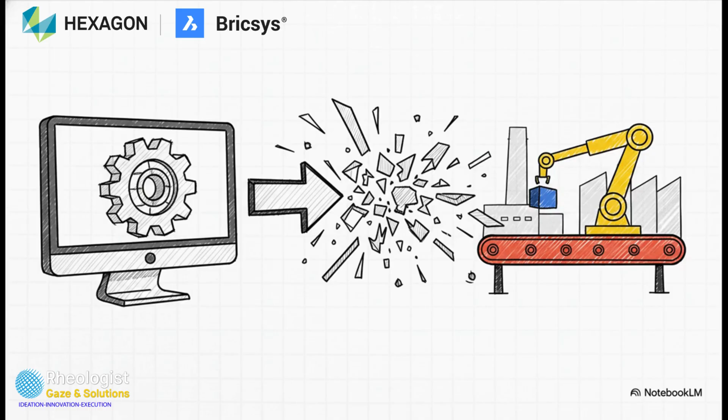That question leads us straight to one of the biggest challenges in modern manufacturing. It's this bottleneck, this friction point that happens when a digital design has to cross over into the physical world. It's one thing to create this beautiful, perfect 3D model on your computer screen, but it's a completely different ballgame to translate that file into clear, mistake-free drawings and parts lists that someone on the factory floor can actually use to build the thing. That handoff, that's where things so often get stuck.

So how do you even begin to fix a problem that big? Well, BricsCAD Mechanical says you have to start at the foundation. Before you can design any faster, you've got to solve two of the biggest headaches in this whole industry: making sure your files can talk to everyone else's, and not getting trapped by expensive software subscriptions. Here's how they tackle those headaches.

First, they stick to the industry-standard DWG format. That means you're not wasting time rebuilding files just because a supplier or a partner uses different software. And second, they offer perpetual licenses. You actually own the software. It's a way for companies to get off that endless treadmill of subscriptions. It's all about giving you control and flexibility right from the start.

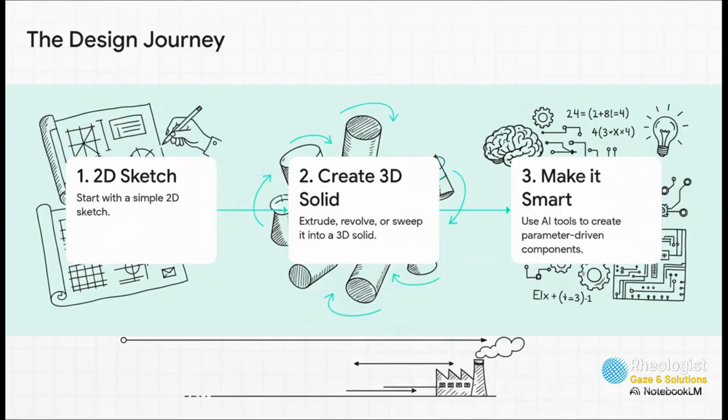Okay, so with that flexible foundation sorted out, we can finally get to the fun part, the design process itself. How does this software actually help you model things faster? The workflow is actually pretty slick. You can start with a simple 2D sketch and then instantly pop it out into a 3D solid. But here's where the magic happens.

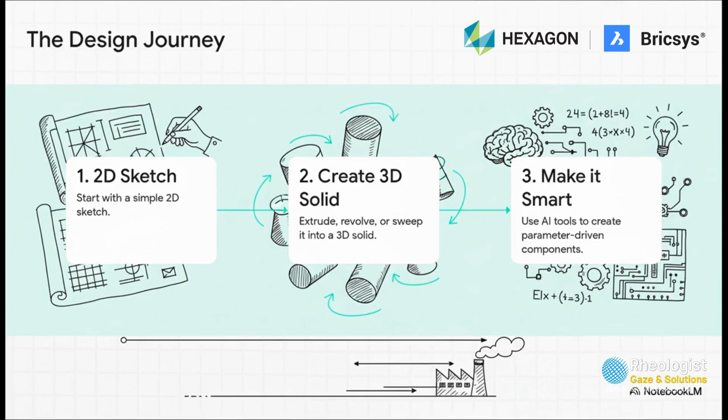AI-powered tools then analyze that shape and make it smart. It becomes parameter-driven. So instead of having to remodel everything, you can just change one number, like the length or the diameter, and the whole part intelligently updates itself. That is a total game changer for making quick changes.

Take a look at this number, 30,000. Any ideas what that might be? That is the number of standard mechanical parts that are already built into the library. We're talking bolts, screws, bearings, you name it, over 800 different types. This means designers can stop wasting hours and hours modeling common parts from scratch and just drag and drop whatever they need right into their design.

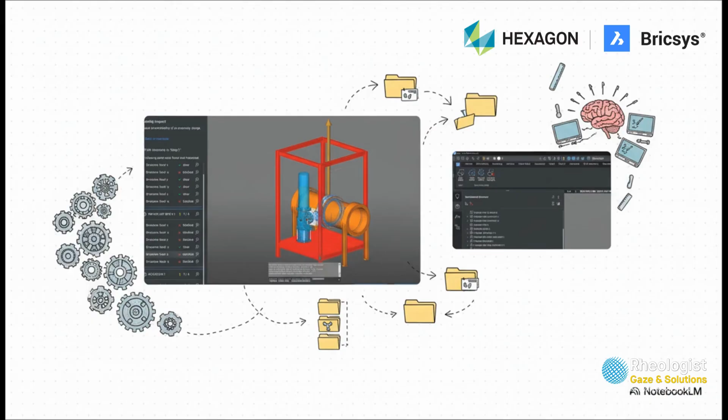And of course, when you're working with thousands of parts like that, staying organized is absolutely key. The mechanical browser, which you see here, is basically your command center. It gives you this clean, simple breakdown of your entire assembly, so you can find and change any part you want, no sweat. Okay, so our digital model is done.

It looks great, but it's still just pixels on a screen. How do we actually get it made? This brings us to that final, critical step, bridging the gap between the design and the factory floor.

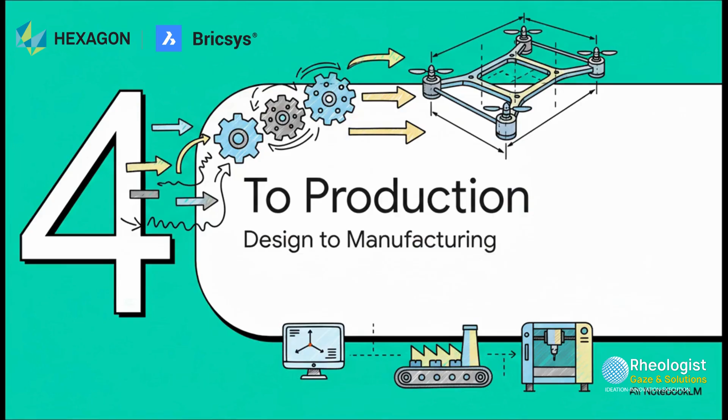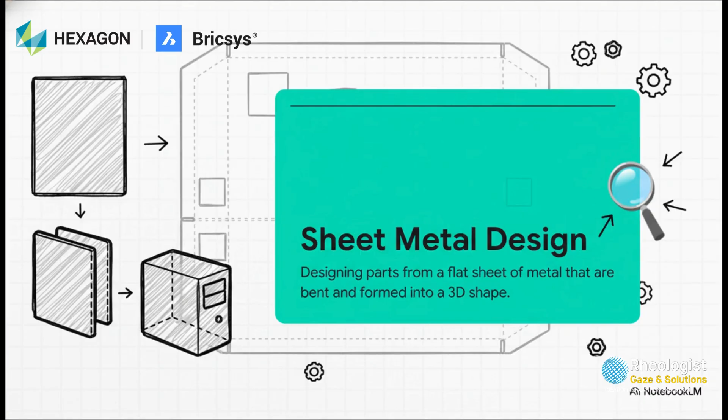First up, let's talk about a really common process, sheet metal. For anyone who's not familiar, it's pretty simple. It's just the process of making 3D parts by folding and bending flat pieces of metal. Think about things like a computer case or an electrical enclosure. So BricsCAD speeds this whole thing up by letting you take a 3D solid and, with just a few clicks, automatically unfold it into a flat pattern that's ready to be manufactured.

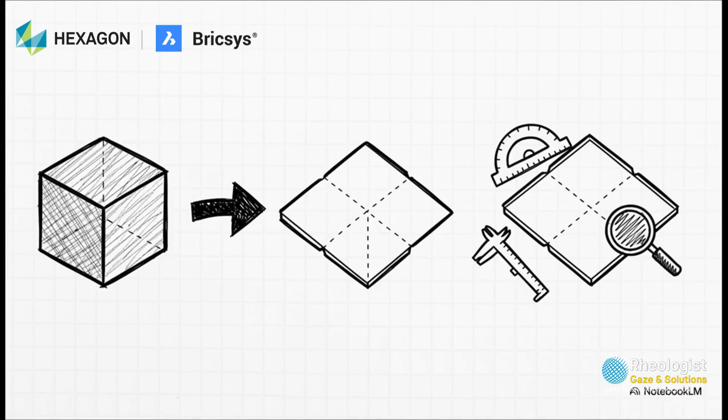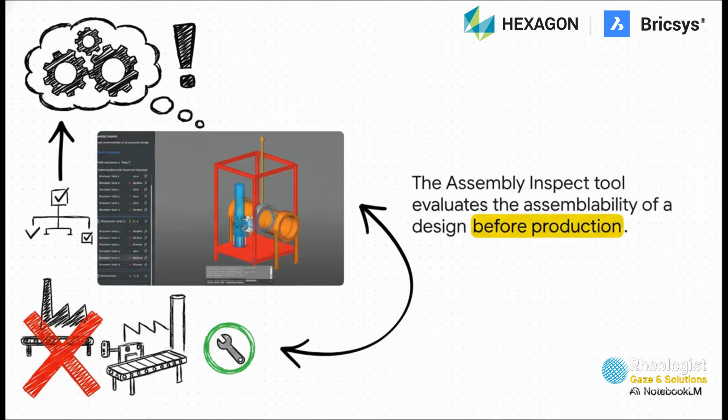From there, you've got all the tools you need to tweak every single bend and corner to make sure it's perfect. But here's the crucial question: how do you know if all those parts can actually be put together in the real world? That is exactly what the Assembly Inspect tool is for. It lets you digitally simulate the assembly process, and it'll flag any potential problems, like parts crashing into each other. Catching a mistake here on the screen saves an absolute fortune compared to finding it out on the factory floor.

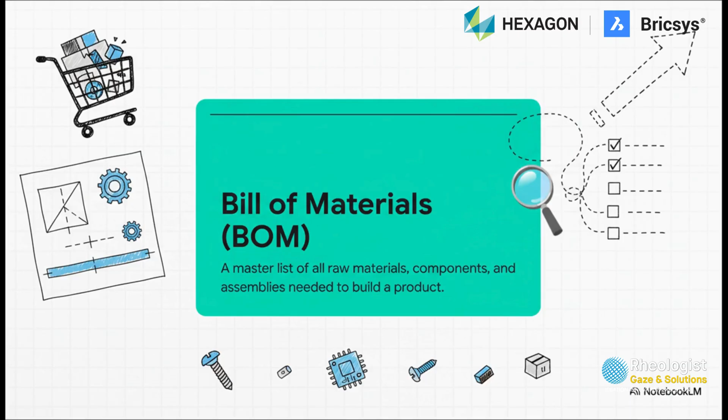All right, so the design is locked in. We know it can be built. Now we need a shopping list for the factory. That's pretty much what a bill of materials, or BOM, is. It's the master list of every single component you need to get the job done.

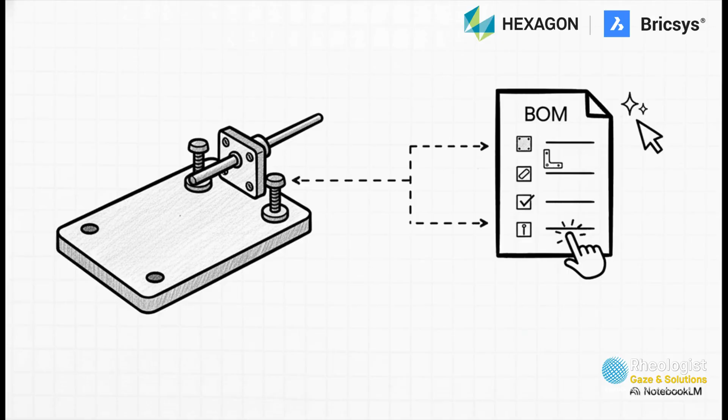And this is where that fastest path idea really comes to life. Instead of someone manually typing out this list, which is slow and super easy to mess up, the software generates it automatically, right from your design. And it's associative, that's just a fancy way of saying that if you change the design, the list updates instantly. No more human error. When you put all of these pieces together, you really start to see the bigger picture.

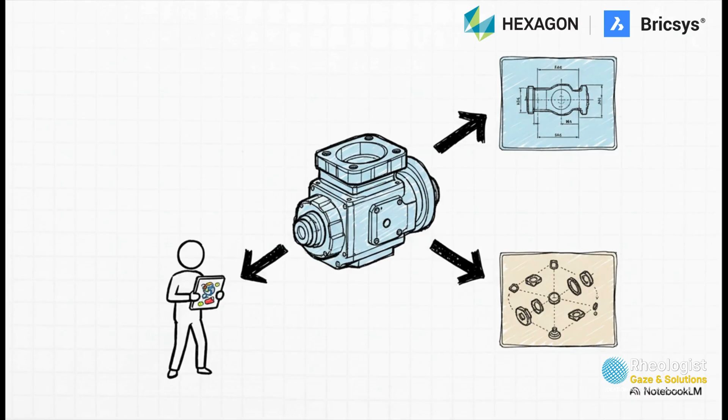It's about having one single platform that can take you all the way from that first spark of an idea to the final materials for production. The real advantage is that the 3D model becomes useful for everybody in the company. That same data can be used to create the 2D drawings for the shop floor, or it can be used to create detailed assembly manuals for the tech writers, even if they have no idea how to use 3D software.

And that brings us full circle, right back to that central promise. It's not just about designing faster, it's about getting complete, accurate materials ready for production in way less time. So I'll just leave you with this thought to chew on: as engineering gets more and more complex every single day, maybe the biggest innovation isn't some new, complicated feature. Maybe it's just a fundamentally simpler, more connected workflow that just gets the job done faster.